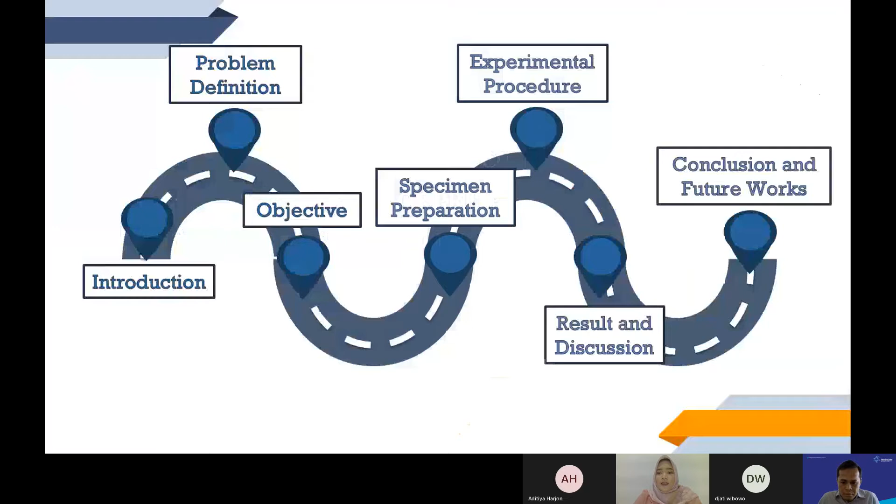First, my name is Ellen Rahmawati. Today I want to present my final year project entitled Experimental Investigation of Compression Properties and Behavior of Pre-Folded Thin-Walled Column Fabricated by 3D Printing. My final year project is supervised by Mr. Farid Triawan. I'd like to give you a brief outline of my presentation. This presentation consists of introduction, problem definition, objective, specimen preparation, experimental procedure, result and discussion, and then the last is conclusion and future works.

Conventional straight columns have been studied and used in many engineering applications for many years because of their excellent mechanical properties, high manufacturability, and low cost. Thin-walled columns are used for structural applications, such as in buildings, bridges, cars, aircraft, and ships. In real life, thin-walled columns often deal with compression. Under compressive load, the thin wall structure will behave as described in this curve.

This is a typical load displacement curve of a circular hexagonal thin-walled column. There are some interesting things from this graph. There is always a peak stress, the first highest stress, and then the load will drop significantly. The load after peak stress is then called mean crushing force or plateau stress.

For energy absorption devices, an excellent thin-walled structure subjected to load should have low peak force and high mean crushing force. It means that the specimen has large plastic deformation to absorb the kinetic energy. But in fact, many thin-walled structures have little or no significant plastic deformation.

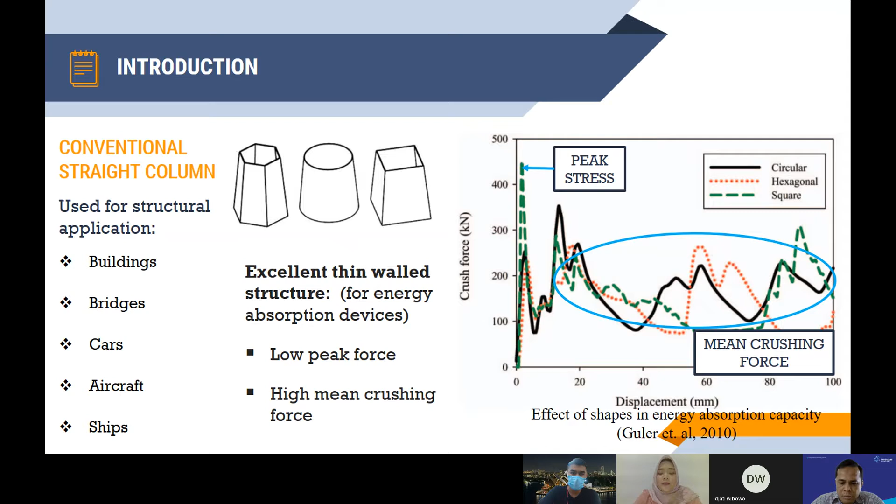For this reason, several researches have been reported to improve the mechanical properties and behavior of thin-walled structures. Many studies have been done on the mechanical properties of thin-walled columns. One approach is to introduce uncircular columns, and another approach is to introduce corrugated structures and internal circumferential grooves on a circular column.

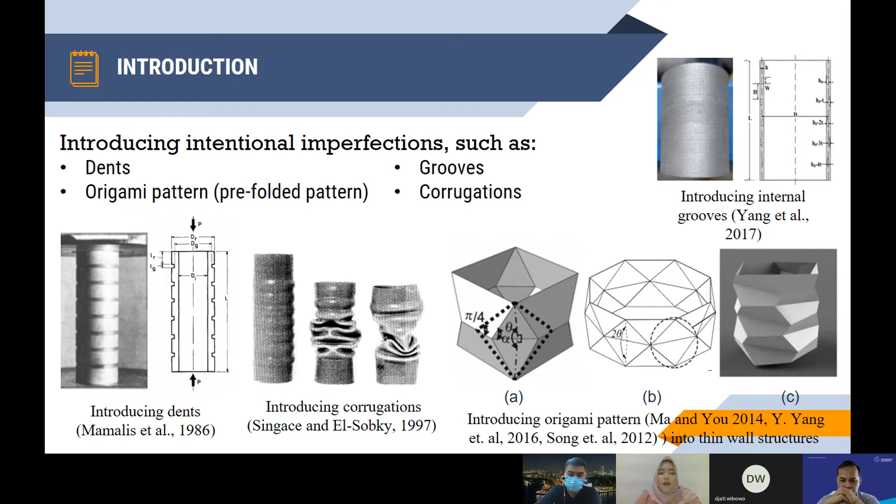Recently, researchers have found that the introduction of origami pattern or pre-folded pattern into thin-walled structure can trigger specific failure modes, which in turn change the structural response and its characteristics. Collectively, this work has promising results to reduce the peak stress while at the same time increase the mean crushing force. However, the conventional fabrication method of this thin-walled structure is difficult to do. Meanwhile, the mechanical properties and behavior of the thin-walled structure can be optimized if the pattern can be modified with more innovative forms. Therefore, 3D printing can be an option for rapid prototyping and high manufacturability.

Usually, the thermoplastic filament that is used for FDM 3D printer is polylactic acid, or PLA. So, can the folding pattern modify the mechanical properties and behavior of thin-walled column made of 3D printed PLA material?

In order to address this issue, the thin-walled columns are designed with a pre-folded fashion shape to investigate the compression properties and behavior of pre-folded thin-walled columns fabricated by 3D printing made by PLA material.

In this study, thin-walled columns of various cross-sections are designed with pre-folded shapes and manufactured by 3D printed PLA material. There are three section shapes: triangular, square, and hexagonal specimens. The folding angle has 5 angle variations, and some parameters are fixed, which are thickness, layer height, total height, and cross-sectional area.

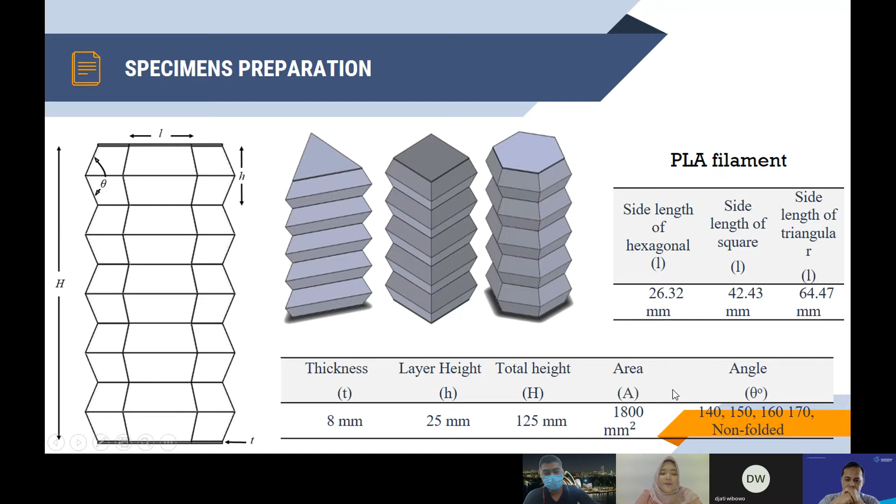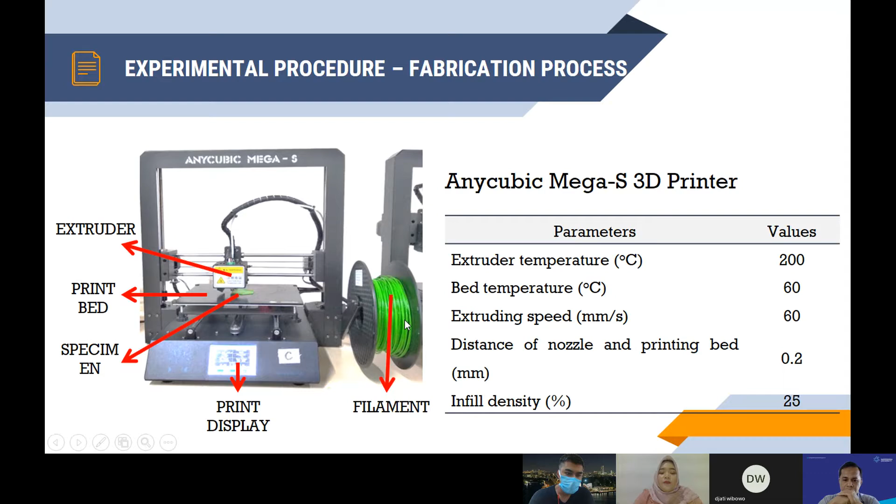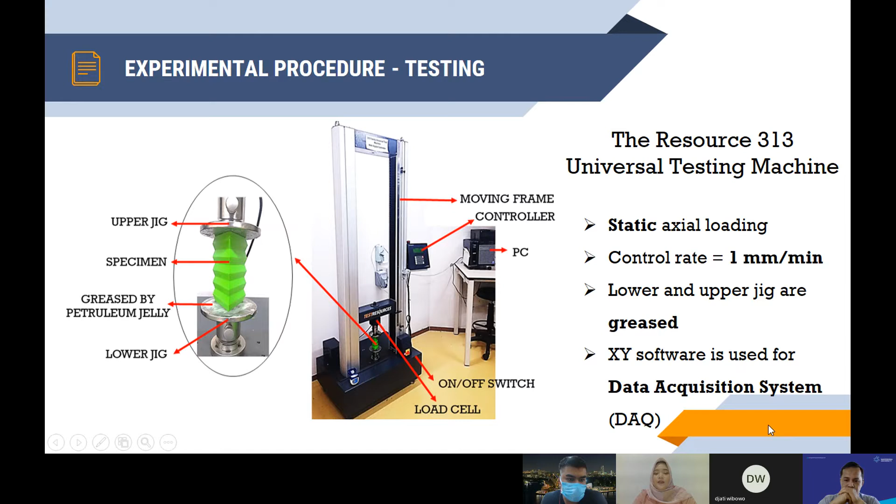From the stress-strain curve, the value of Young's modulus, ultimate compressive strength, and strain at failure can be known. Ultimate compressive strength is the maximum load that can be held by a specimen when being compressed, and it is indicated as the maximum point in the stress-strain curve. Strain at failure is the deformability that can be reached by the specimen before it fails.

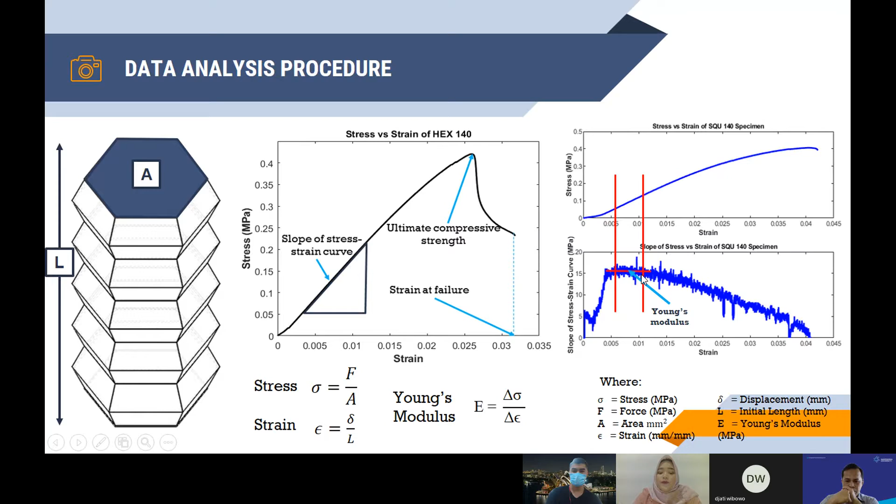Young's modulus is the stiffness of the material, and it can be calculated using the slope of the stress-strain curve. In order to get the accurate value of Young's modulus, it is extracted using the slope of the stress-strain curve, and the value of Young's modulus is determined from the highest value of the slope curve. This is the stress-strain curve.

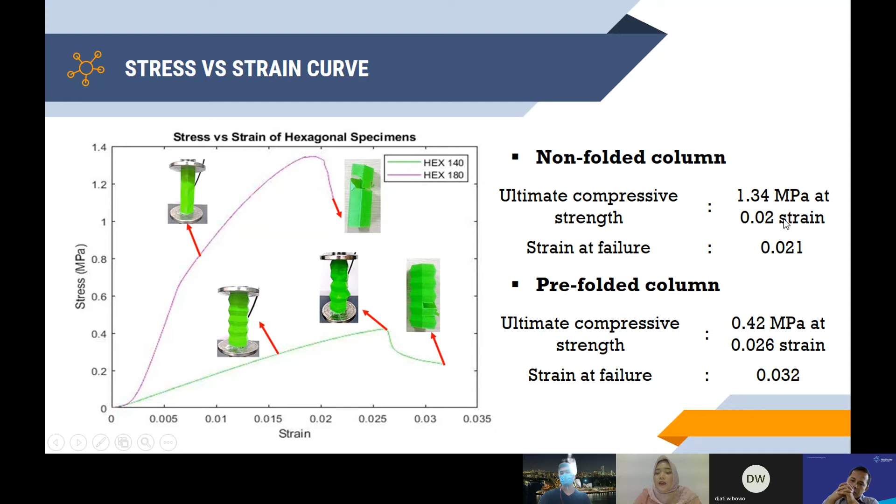Moreover, by modifying its cross-section, there is also a different value of Young's modulus. In this case, the triangular section has the lowest Young's modulus compared to the other cross sections. It means that the triangular one is more soft or flexible than the others.

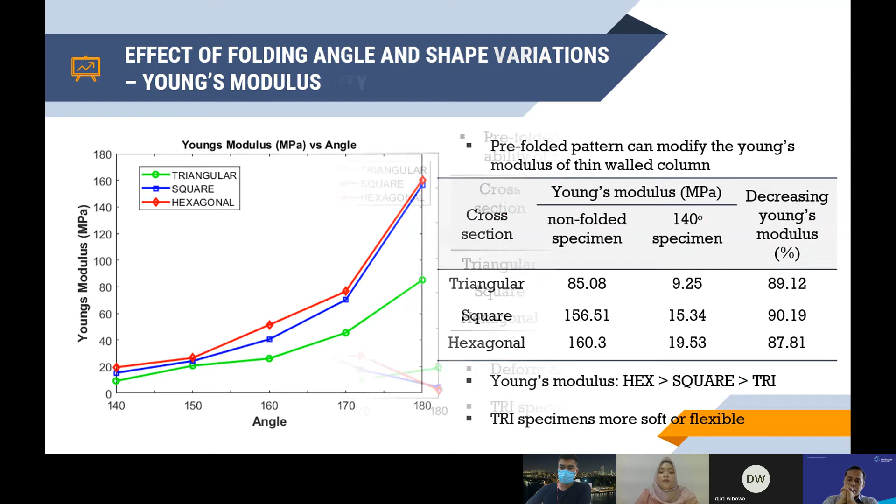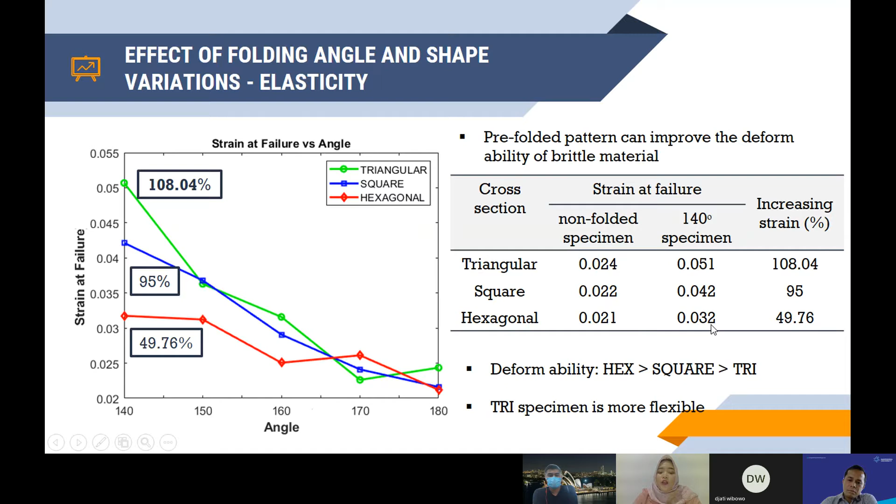As the pre-folded pattern is introduced, we can see that the strain at failure or deformability of a structure can be modified into a higher value. Moreover, by modifying its cross-section shapes, we can also have a value of strain at failure or deformability. In this case, hexagonal has the lowest value of deformability compared to the other cross sections.

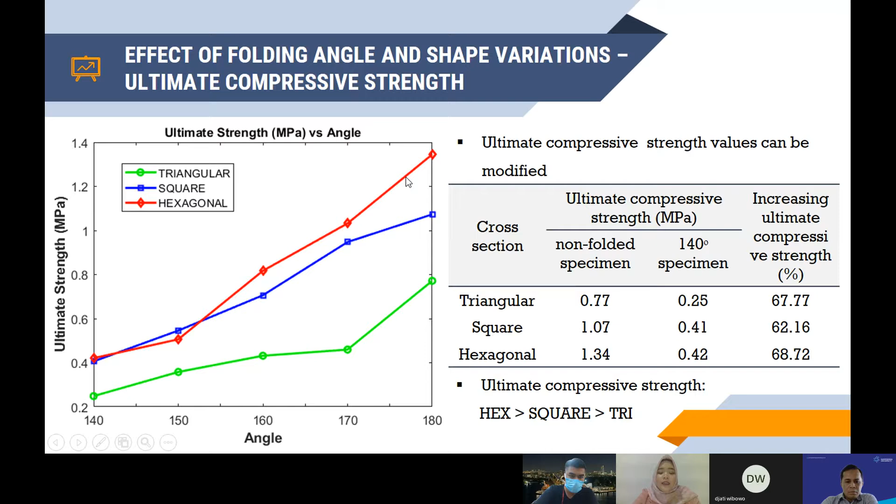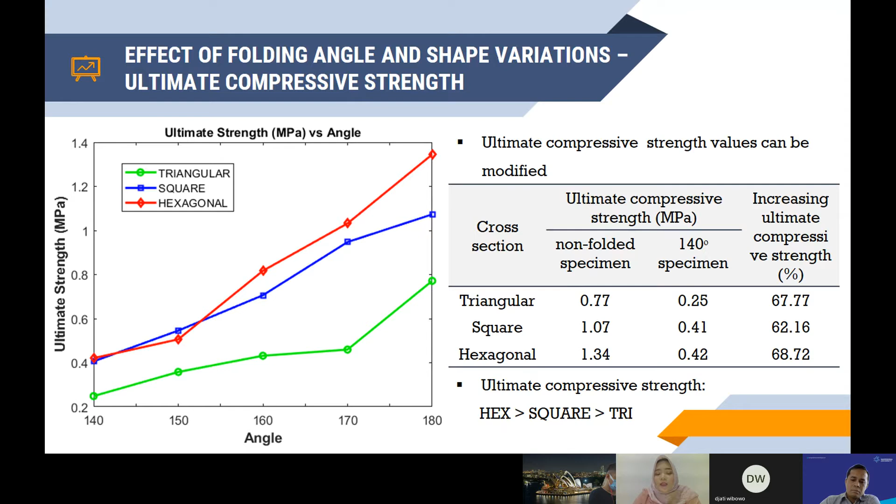If we compare between triangular, square, and hexagonal, apparently triangular specimen shows the lowest ultimate compressive strength compared to the square and hexagonal. As shown in the table, the value of ultimate compressive strength of the hexagonal specimen is almost twice the value of the triangular specimen. The possible reason for this result will be discussed in the discussion part.

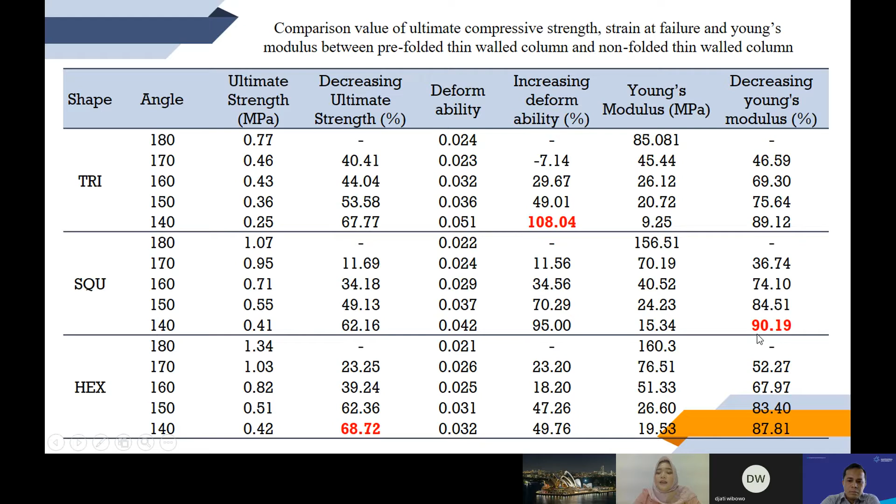And then this is the data for comparison value of ultimate compressive strength, strain at failure or deformability, and Young's modulus. In this figure, we know that introducing the folding pattern into thin-walled column can increase deformability by 108.04%, decrease the strength by 68.72%, and decrease Young's modulus by 90.19%.

There are two possible reasons why the folding angle and cross-section shapes can affect the compression properties and behavior. The first reason is due to the number of folds or plastic hinges. Hexagonal specimen has 126 plastic hinges, while triangular has only 63 plastic hinges, which is half of the hexagonal. In the 3D printing process, there are several things that cannot be avoided. One is increasing the thickness of the meeting point of edges. As the angle decreases, the thickness of the meeting point increases. This thicker structure will cause the structure to withstand more energy.

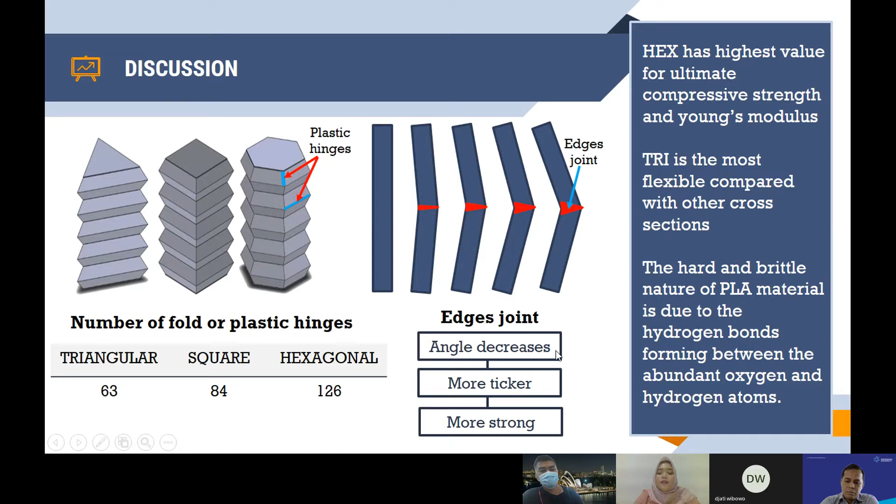Therefore, hexagonal specimen has the highest value of ultimate compressive strength and Young's modulus due to the number of folds or plastic hinges and the average thickness that is more than the other specimens, so they can withstand more stress. The average thickness of triangular is lower than the other specimens due to the number of folds or plastic hinges, so the ultimate compressive value of triangular specimen is the lowest. And 3D printed PLA shows brittle characteristic due to the hydrogen bonds forming between its abundant oxygen and hydrogen atoms.

From this, the non-folded and pre-folded thin-walled columns show different failure modes. The non-folded pattern collapses with random fracture shapes. Meanwhile, the pre-folded pattern collapses with similar fracture shapes. This happened because of the geometric imperfection or folding pattern that leads the thin-walled column to deform by following the folding pattern.

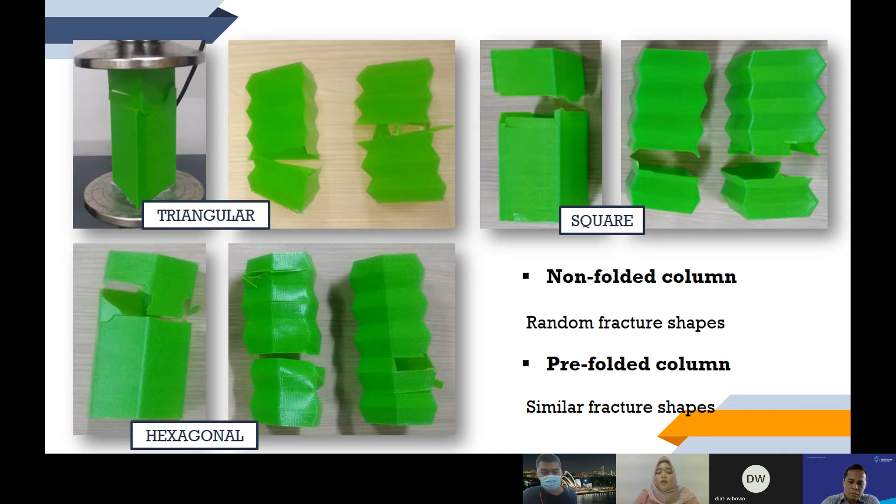In conclusion, this experimental result shows that introducing the pre-folded pattern in thin-walled column can dramatically lower Young's modulus by 90.19%, increase its deformability by 108.04%, and at the same time lower the ultimate compressive strength by 68.72%. The effect of shape variation is directly proportional to the effect of angle variation. As the section and angle increase, the Young's modulus and ultimate strength increase, while the deformability decreases. The non-folded pattern collapses with random fracture shapes. Meanwhile, the pre-folded pattern collapses with similar fracture shapes.

I realized that more studies and research are recommended to make a better view of 3D printed PLA. For this reason, I would like to suggest the following recommendations and future works. First is to develop finite element modeling analysis, so the effect of angle variation can be well explored. The second is to develop a 3D printed PLA specimen mixed with other materials that have plastic deformation. Thus, research on plastic deformation can be done using this composite specimen so that various unique designs of thin-walled column can be well explored. With these recommendations, 3D printed PLA can be used in wider scope.

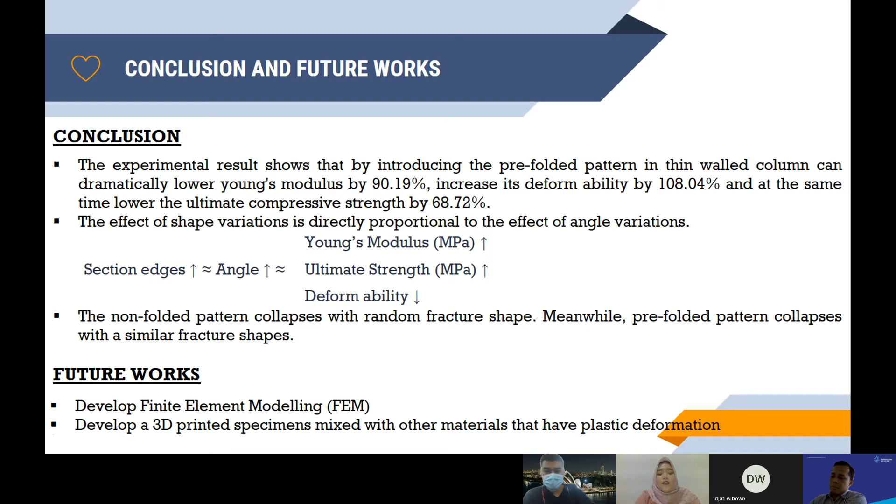Thank you. Thank you, Elin. Just in time, 20 minutes. I think you did a good practice. Okay, I think now is the time for question and answer. I will invite anyone, maybe from Pak Adit or Pak Jati, who would like to start first. Please feel free.

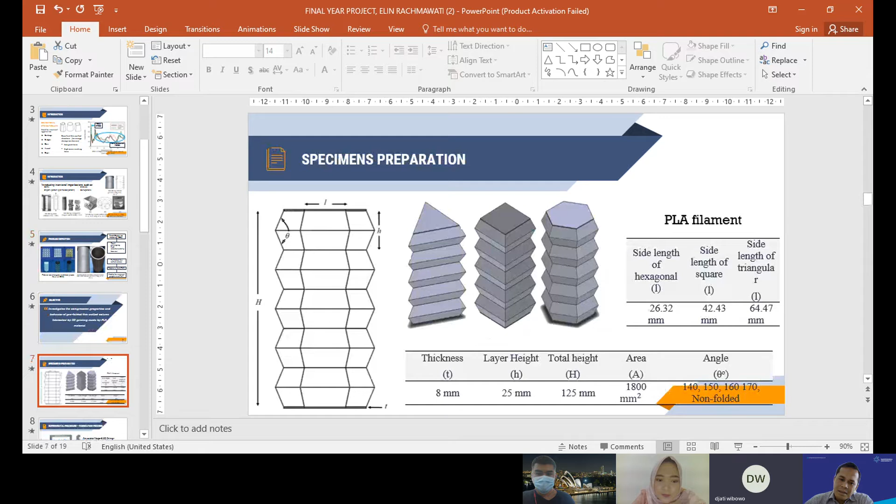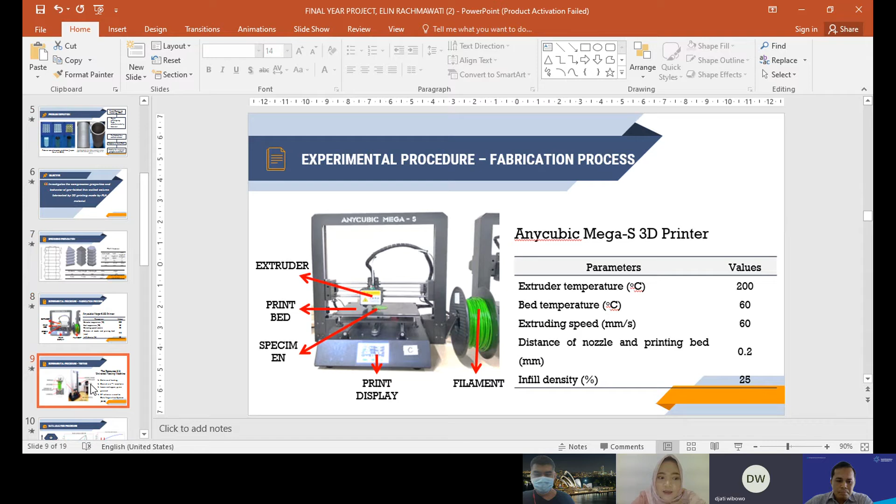Can you go to the slide where you show the experiment setup? This one, sir? Not that one, where you show the machine, the compression test machine. Maybe slide 9. Okay, slide 9. Yeah, I don't doubt your results. Your result is good, you tell a good story, and get a good conclusion. So I'm just asking some basic things here. Why is the control rate over there 1 millimeter per minute?

The 1 millimeter per minute is the velocity of the upper jig, right? The load cell. The control rate of the load. Okay, so the load will go down at a rate of 1 millimeter per minute, right? Yes. What if I use 1000 millimeters per minute? So the velocity will affect the mechanical properties and behavior of the structure.

And is it the velocity that affects it? In static problems, the response can be calculated. What, sir? Is the one affecting the properties the velocity? I mean, in a static problem, load is constant with respect to time, while on the other hand, the dynamic problem is time-varying in nature because both loading and response vary with time. So you mean as long as it is constant, it's okay, right? I give 1000 millimeters per minute, a constant velocity.

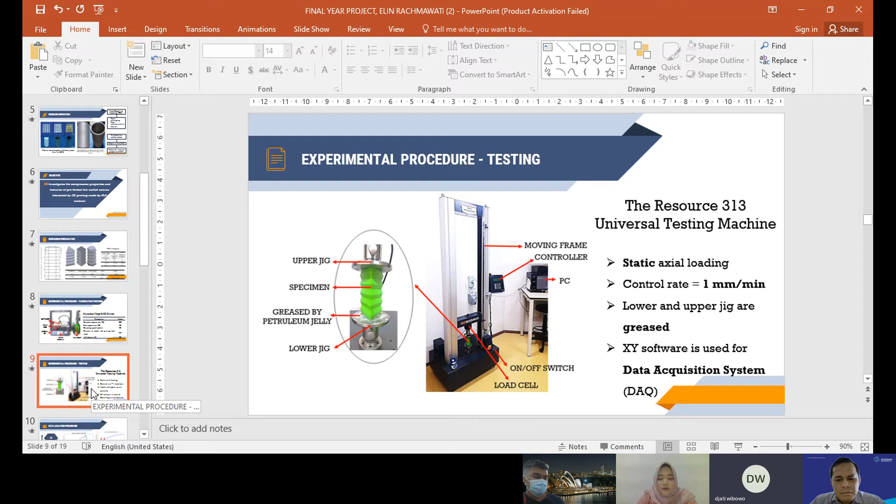Okay, I have one more question. What I get from your study is that it seems that you introduce folding into the thin wall column, so that the material becomes weaker. You want to lower the peak stress, you want to lower the ultimate stress, right? Yes, ultimate strength, yeah.

So why don't you just change it to a different material with a lower Young's modulus, or lower, let's say rubber? So I want to know the effect of this pre-folding angle in this thin wall structure by comparing the non-folded and pre-folded one. By comparing this angle, then I know that this structure can modify the mechanical properties and behavior of the thin wall structure, sir.

But if we compare to the other material, sir, we cannot compare this material to the other material, sir. Yeah, of course you are modifying the structure for a certain purpose, right?

Your purpose, I can see, is you want to make the system have longer deformation, longer strain, which for some kind of purpose, you can change the material with a different kind of material. So my question is, what is the advantage of this approach rather than just changing the material, or maybe you go to the chemical lab and make a new material?

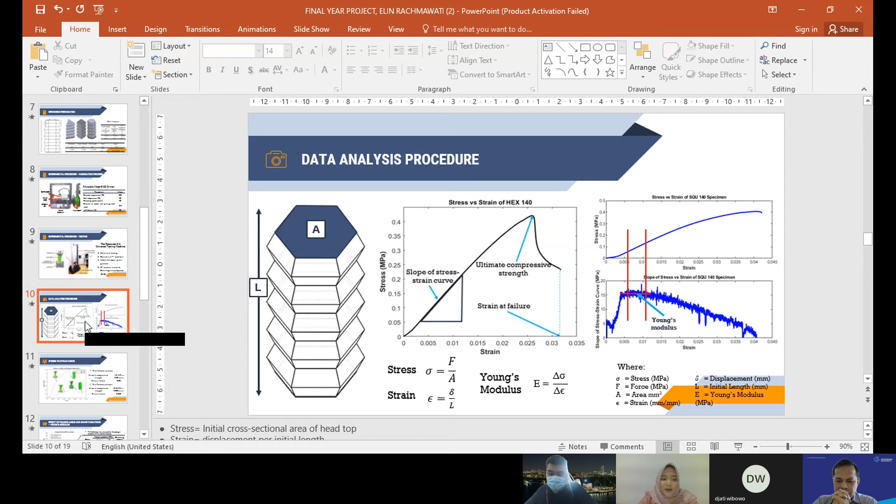The advantage of this approach, wait, sir. One of the advantages of this approach is the fracture. If we see the fracture shapes in non-folded shapes, we know that the non-folded shapes collapse with random fracture shapes. It will make the thin wall column bricks, it will make the thin wall column unstable when it is being compressed, while the pre-folded one is a little more stable compared to this non-folded one.

What I mean is, what if I go to a chemical lab and bring you a material with the same square shape, hexagonal shape without folding, and give you the same properties? Why should I choose your approach?

Because we modify the mechanical properties as we want for some applications, sir. If we want lower Young's modulus, we can use triangular with 140 degree. And if we want a specimen with high ultimate strength, we can use hexagonal. Yes, sir.

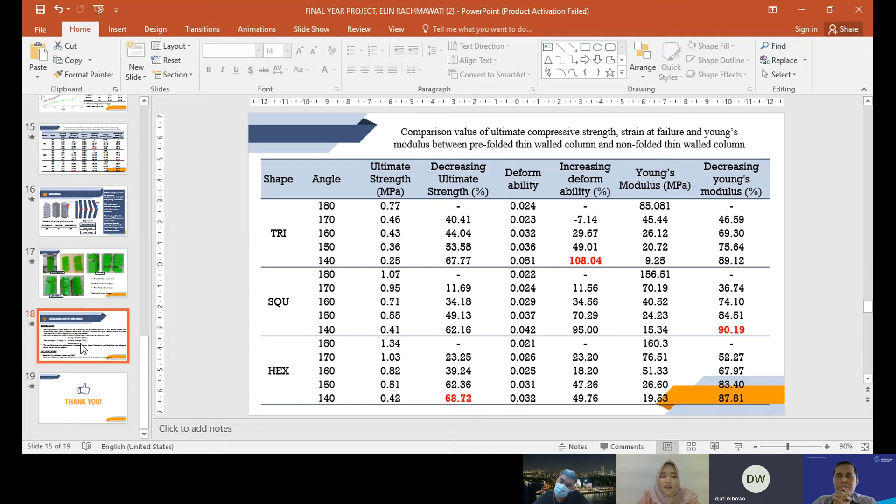I still don't get the answer. I believe there is a reason why this approach is being taken, and I think Pak Farid knows it better than me. Why do we need to study this? Why don't we just go to a chemical lab and do a molecular study, make a new material?

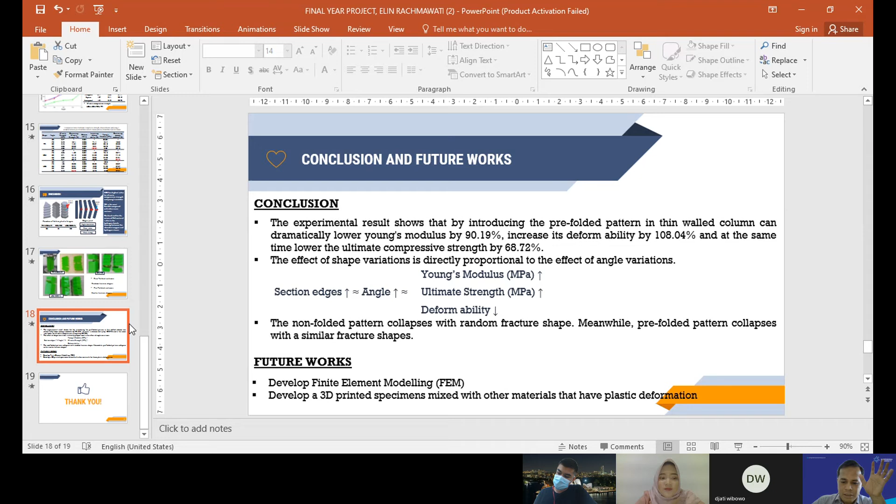Elin, you should answer Pak Djati. It's already in your slides in the beginning. Why did you choose this? Elin, you should be able to answer Pak Djati's questions because the answer is already in your slide. In the beginning, why did you do this research? What is the urgency?

Oh, I thought that Mr. Djati asked a different question, sir. So...

The fabrication process of this thin wall column is difficult to do if they are made from metal material, usually from brass, aluminum, or steel, sir. And then I came up with this approach because it has this advantage, sir.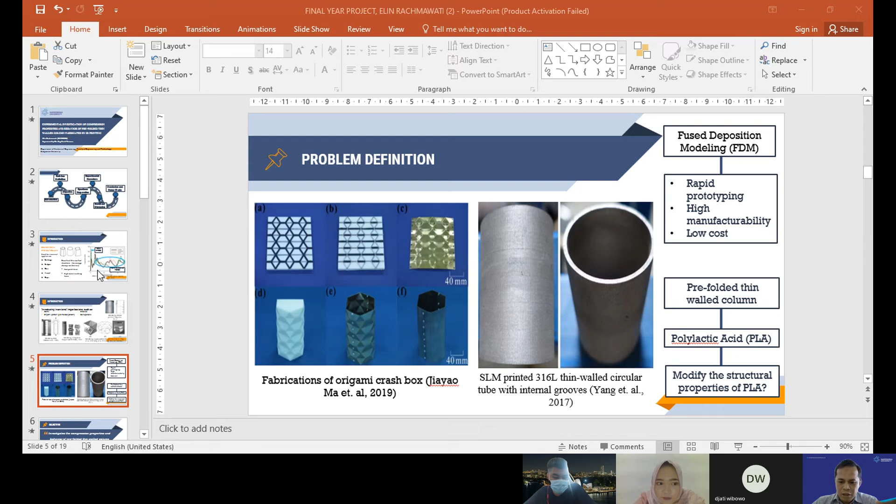Elin, you should mention that recently many researchers are putting more attention to pre-folded origami structures because they can improve mechanical properties by lowering the peak force while at the same time increasing the mean crushing force. So the novel behavior is expected.

You should mention to Pak Jati the fracture modes. Didn't you say something about the fracture modes? Can you explain to Pak Jati what you expect from the origami or pre-folded structure regarding fracture, the failure mode?

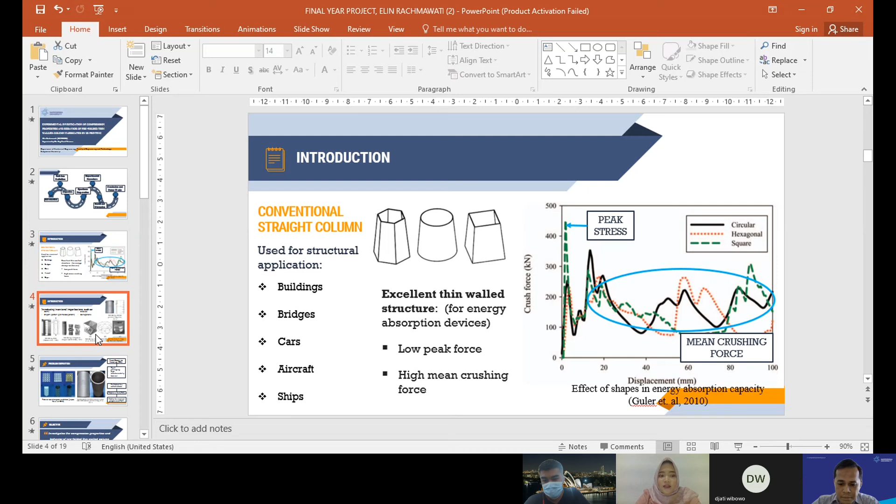Yeah, the pre-folded thin wall column was designed to make a special shape. For example, in circular columns, we can get diamond shape failure modes. And for the square thin wall column, we can get the asymmetric failure mode, sir.

Each shape gives different fracture modes. At the end, I want to show that my pre-folding angle shows a similar pattern of fracture shapes, sir.

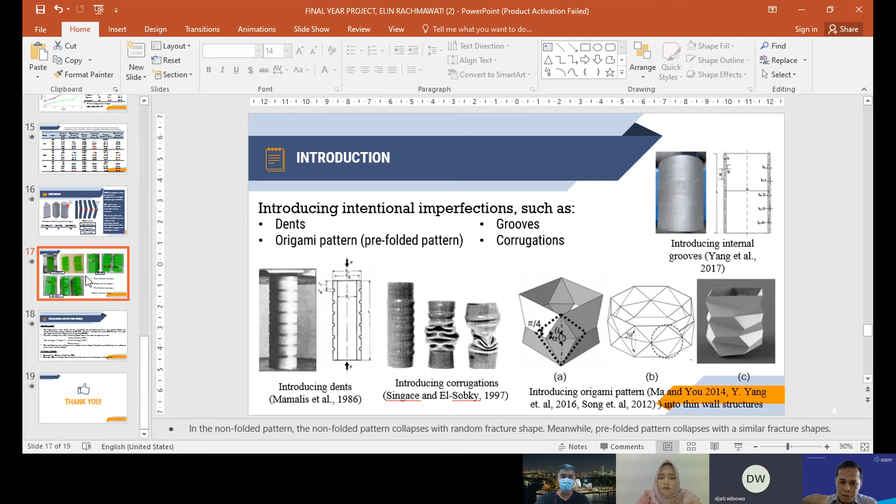While the non-folded, you should say you can design the failure mode by the pre-folded. That is why Pak Jati did not get the idea of your thesis. Those kinds of explanations should be put in the literature review. Why pre-folded? Pak Jati can just ask why you should do this complicated shape, while an engineer can just come up with a different material and show similar behavior.

So that very unique characteristic of the pre-folded structure is because, again, you can design the failure shape, the fracture shapes, the failure deformation modes. So I want you to really emphasize that.

Emphasize that in your thesis and your paper, Elin, because that is why we are doing this. You did this experiment a lot because you want to prove failure mode can be controlled. Therefore you can select what strength is necessary, what Young's modulus is produced. Even though at this time, unfortunately, it cannot proceed until the plateau stress.

Pak Jati, do you have any more questions? Thank you for the good question, Pak Jati. No, Pak, I can ask this kind of question because we work together with Gerald's paper, right? So I can ask something like this. Yes, sir, okay, I have no more questions, Pak Farid, Elin.